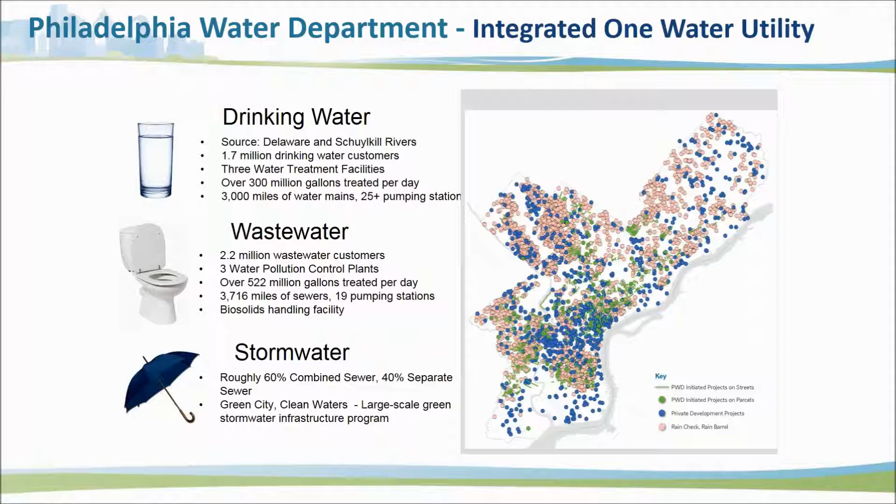And we are responsible as well for stormwater for the city of Philadelphia. So lots of responsibilities, and you can just see some of the distribution there. I will get into what that smattering of dots means later on in the presentation, but that's the part I'm real excited to share with you today.

Being a fully integrated utility that has those responsibilities, we have a lot of compliance obligations presented to us as well. We have combined sewer overflow requirements, we have our separate stormwater permits, we are responsible for stream and habitat work, we have some sediment-related TMDLs, and we have to protect our drinking water supply for over 2 million people. And we do this all obviously with a stakeholder in mind, with our ratepayer in mind.

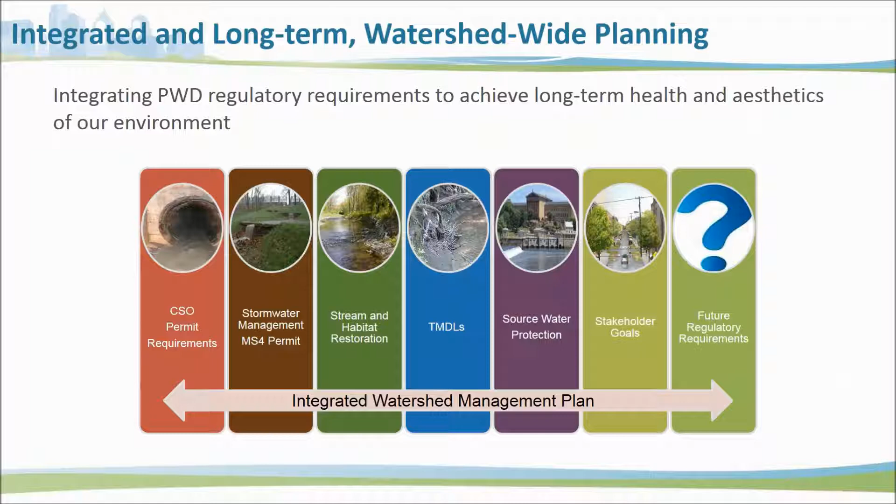That is how we collect money, and that is how we do our business. So yes, definitely integrated. We think long-term, we think watershed-wide, and we think not just about the now, but how we're investing in approaches that help us meet future regulatory requirements.

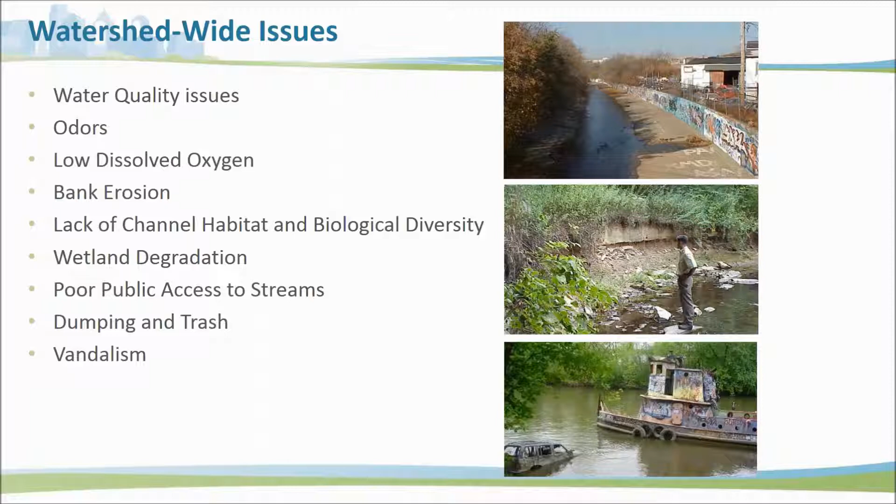Unfortunately, being an old urban center, when you start thinking watershed-wide, when you start looking at your water environment and what's remaining of it, when you do have combined sewer overflows and separate sewer areas, we have a lot of issues. A lot of people say, why are you showing this slide? This is terrible. But this is the challenge, this is what we're up against as water resource managers. How do we take poor habitat and stream channels and vandalism and odor issues and channelized portions? These are the water resources we need to protect. And in order to protect that, we have to think a little bit differently about what the solutions may be.

Understanding that maybe some folks on this call may not know combined sewer versus separate sewer, very quickly just wanted to show the difference. They both have their problems. In dry weather, we actually can treat a lot of the sanitary flow that falls in our pipes. But during wet weather, we actually exceed the capacity, and that's where the problem is. We get diluted sewage, we get all kinds of stuff, antifreeze, oils, pet waste, you name it. The stuff in your toilet, the stuff in your washing machines, all have the potential to exit and hit our water bodies.

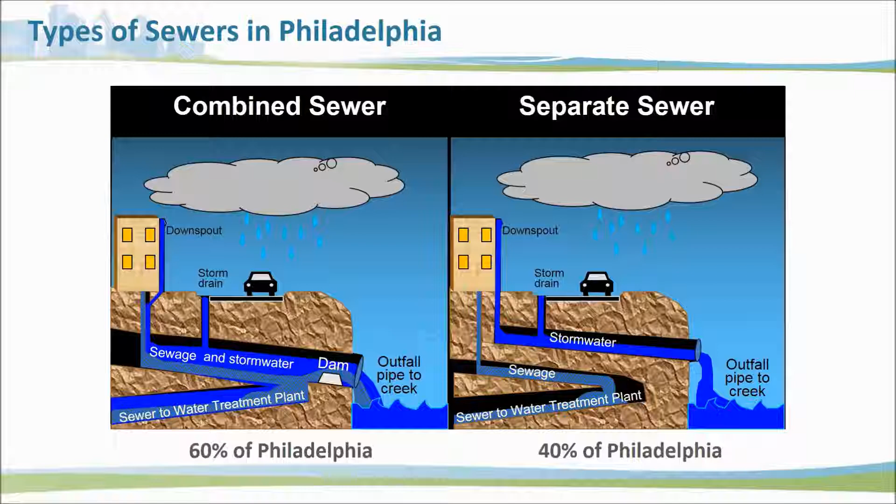And that's really the challenge we're going to focus on today, trying to meet combined sewer overflow policy requirements. Just to give a little bit of a glimpse, this is not just a national issue, it is a national issue, but it's very specific to certain areas throughout the country. Philadelphia is one of those communities that is subject to combined sewer overflow policy, as it all kind of started out of the Clean Water Act in 1994.

The program we're discussing today is much bigger than just the green aspect, but our green infrastructure piece is the backbone of our program. I say that, and I'm going to focus on this as we go through the lessons learned and the implementation of the last 7 years. This is a 25-year plan, a multi-billion-dollar plan, we estimated it in 2009 to be a $2.5 billion plan. We may actually be spending more than that, and that's one of the points I'll raise later on in this conversation.

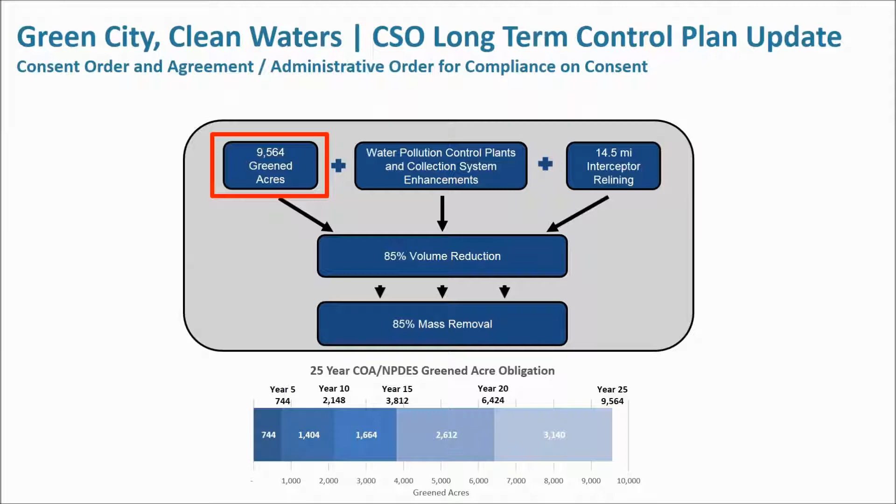It's not just a green program. It relies heavily on plant expansion, upgrades, and relining a whole bunch of our crucial intercepting pipes throughout the city. You can't have a green infrastructure, nature-based, source control type of approach without having a very, very strong traditional infrastructure backbone. So I want to make sure I give the credit to our traditional infrastructure that's due. Keeping water out of your sewer system doesn't mean anything if you don't have a sewer system that's doing the majority of the work. So I will definitely be focusing on the non-traditional elements of infrastructure, but very much respect, appreciate, and I'm grateful for the traditional infrastructure that is there. So a 25-year program with 5-year implementation chunks, and I'll get into this a little bit more.

So what is green infrastructure? This may be redundant or obvious to most folks, but I really just wanted to focus on a lot of these key words here. We look at any bit of infrastructure that does interception, infiltration, evaporation, transpiration, some harvesting and reuse, and even some instances where we get storage and slow release back into the system, all meeting the terms of our greened acre. The greened acre, although it sounds like it's a physical dimension, it's actually a volumetric measurement.

So we're looking at the amount of water that's managed, the depth of water managed over an impervious acre. To elaborate, if we were to manage 1 inch of water over a 1 acre impervious parking lot with a small bioswale, as long as we managed 1 inch of water from that acre, we actually say that whole parking lot is a greened acre, even though the physical expression may only be 1/10 of an acre with a bioswale.

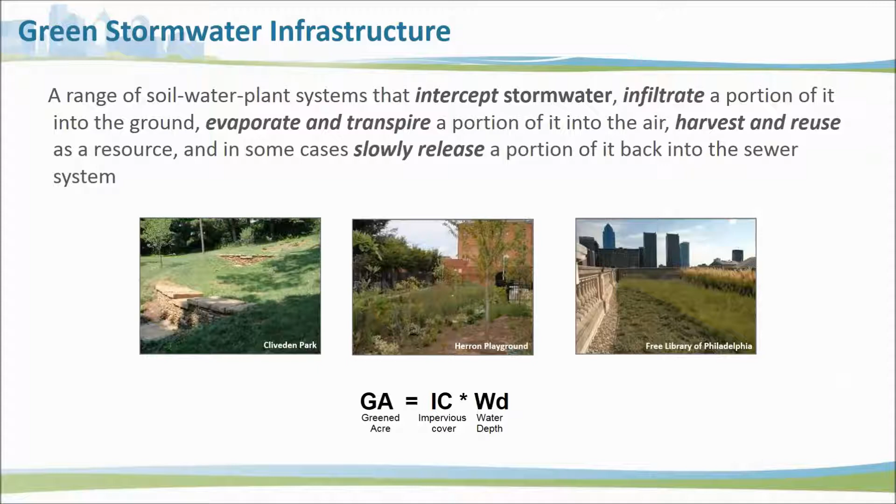The opposite of that could be a green roof, where if you're managing an inch of water over a 1 acre green roof, that too is calculated as a greened acre, but it actually is a physical looking and acting greened acre as well. So it really is just a measure of volume and a measure of greenness to an extent. I just wanted to clarify that up front.

So that's what green is. The why are we looking at green infrastructure? I mentioned that we're an integrated utility. We're thinking about the Clean Water Act, which is your fishable, swimmable, and we also think about what we have to do from a source water protection standpoint through the Safe Drinking Water Act, which adds that drinkable element to it. And then I mentioned thinking about our ratepayers and giving back and investing in our communities and trying to maximize the return on investments. And then you add the safe, attractive, and accessible piece to that as well.

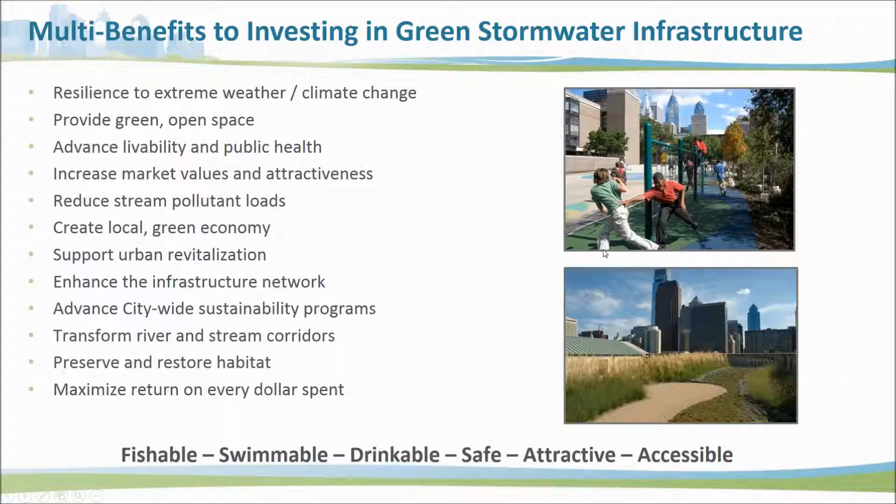So compliance meets ratepayers' needs and wants, and that, I think, is the benefit of green infrastructure. A lot of the things you're going to see on the screen here too: green jobs, urban revitalization, public open space, adaptation and scalability and flexibility with dealing with a changing climate, advancing city sustainability goals, thinking about the whole system, not just end of pipe kind of solutions. So that's kind of the benefit of why we went down the green infrastructure path.

I talked about the 5-year increments, and these numbers are kind of drastic. This is the point in time we're in right now. I said we're about 7 years in - we actually just hit our 7-year mile marker on June 1st of this year. Just to give you a glimpse of where we stand, I'm giving you the good news: we're over 1,100 greened acres complete, and we have about 2,000 that are in works right now. So we're very much on our way to meeting our 10-year compliance obligation, which is June 1st of 2021.

But what you can see here, these are big numbers. These are big numbers in a dense urban environment, so they're a little bit skewed towards the tail end. You see it's kind of an exponential growth. But we're looking at modifying or managing stormwater from an urban setting for about 1/4 or 30% or so, 1/3 of our combined sewerage section of the city of Philadelphia here.

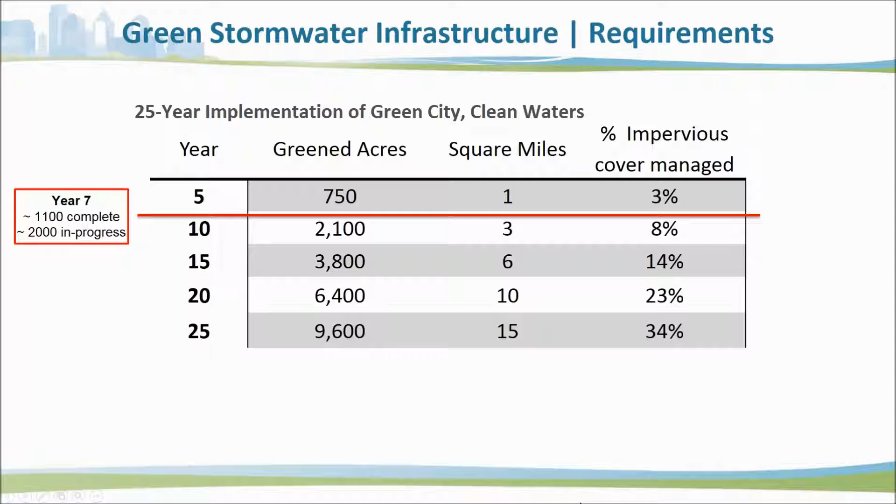Pretty big numbers, so I tried to dust off a graphic we used for a big celebration to try to save some money. This was our 5-year celebration, just wanted to let you know we're 7 years in. And I wanted to focus on kind of the 3 tools that have been our major delivery mechanisms of how we've gotten our green infrastructure to date and how we do business.

And I raise this only because to me this is more about a philosophy. We knew we had uncontrolled stormwater runoff issues in the city, so the first line of defense was us instituting stormwater regulations. I'll go into this in more detail, but when you know you have a problem, your first line of defense should say, maybe we shouldn't make it any worse. So we were able to interject ourselves into the stormwater, into the development process here in the city. Basically anyone that builds in the city now has to meet stormwater management obligations for channel protection, flood control, and water quality requirements.

So the idea is that new development does not do any more harm here in the city. Looking at the center piece there, the incentivized retrofits: for existing properties that generate stormwater runoff, we've actually come up with a program to incentivize retrofits where they manage water on that site and get a stormwater fee reduction to take water that is contributing to our system and try to limit how much is getting into the system. So the philosophy is taking what is already there and trying to have it do less harm than what it does.

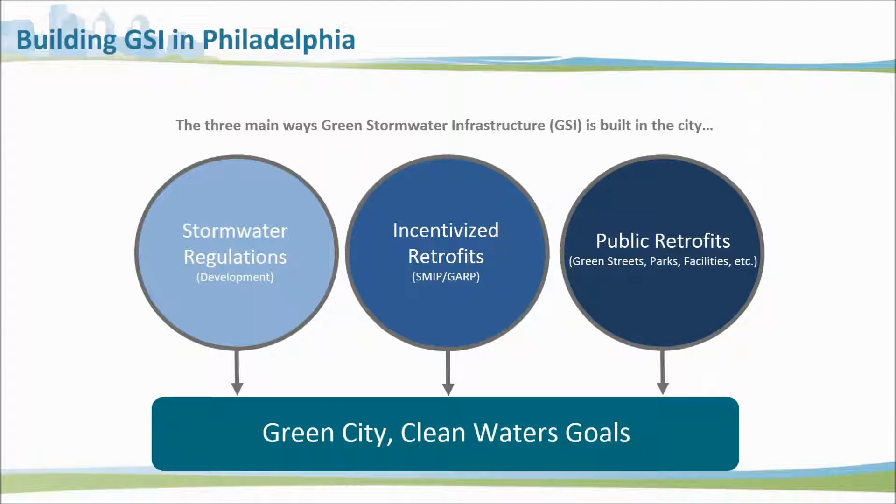You look at the third arm too, which is our direct public retrofits - kind of that last line of defense. If you're not regulating it and you're not trying to undo what's there, how can you strategically place and invest in new infrastructure to manage water and take some of the burden off your system? That's the third arm of the program, how we do direct public retrofits.

So what are the fruits of our labors to date? 7 years in, you can see about 80% has been delivered through private development, or through our public-private partnership with these incentivized retrofits. And then about 230 or so acres that have been delivered by way of public retrofits. So that's kind of the breakdown.

You're seeing a lot more dots in this area, and you're also seeing dots that transcend just the combined sewer area to be citywide. That's because our CSO program, or Green City Clean Waters program that meets compliance obligations, is focused on investments - that's the 1,000 acres in the combined sewer area. But our stormwater regulations, our incentivized retrofits, and our homeowner retrofit programs actually happen citywide. So Green City Clean Waters the compliance program is a little different than Green City Clean Waters the philosophy - the vision, the ambition, the goal to think about our entire city and region using nature-based solutions to manage stormwater-related activities.

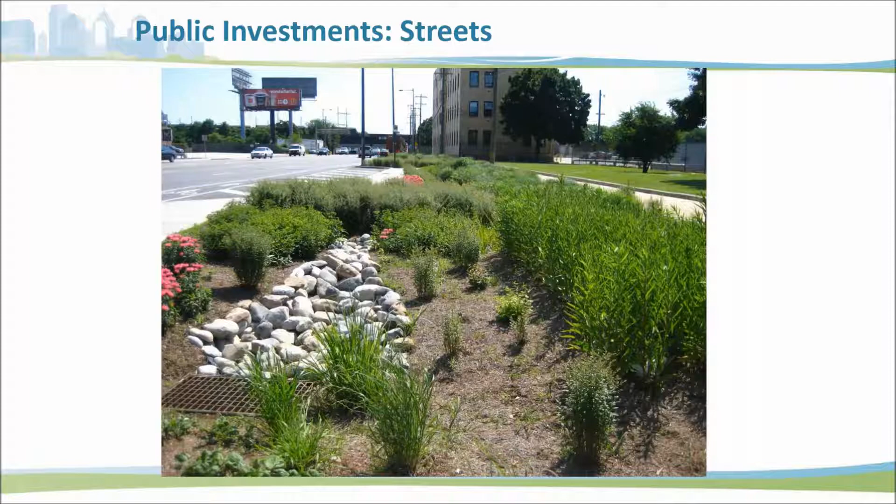Areas where we have the ability to integrate it into the landscape, we do more of the rain garden concept like you're seeing on the right. We modify some of our schoolyards - we try to keep as much water at the surface as possible, keep these things green stormwater infrastructure. But sometimes they are stormwater management practices, and some of the magic is happening subsurface, like in the photo on the right, which is a lot of porous pavement and a pervious ball field where a lot of the water is actually soaking through into the underground basin structure.

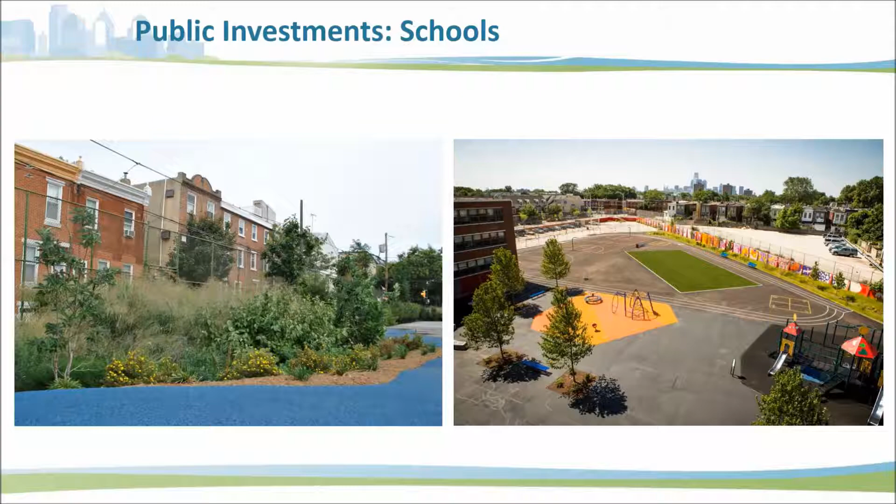And when we have the ability to do homeowner retrofits, we do some downspout disconnects, and we bring water to rain gardens or through flow-through planters or rain barrels. So just some looks and feels of what we've done.

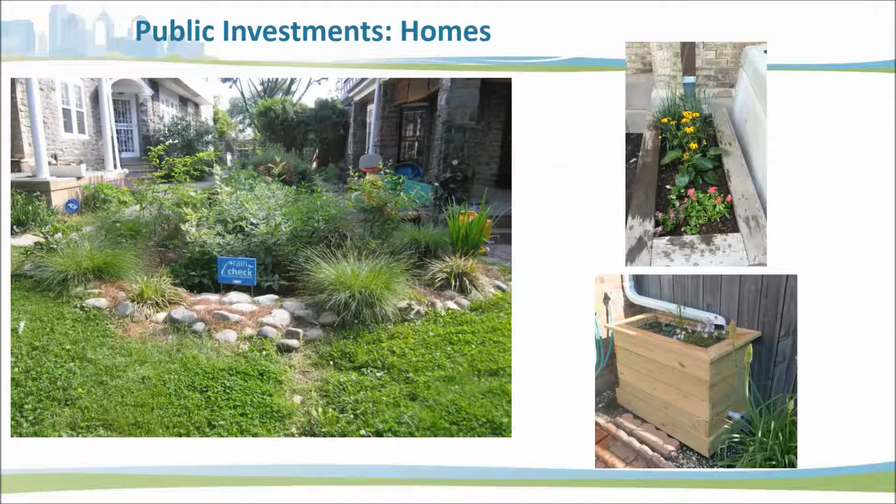Some of our applications through our development regulations have really been embraced by the development community. You have an individual or a company that owns a hardware store - when they did development, they managed a lot of their runoff through periphery bioretention and swales on the outside. Or you have something like green roof development where people have integrated that into their business model and usable space and financial gain by also meeting our stormwater regulations.

And then just some examples of parcel-based retrofits and these incentive programs we offer. You have people really looking at their land use, trying to figure out whether or not they really need that impervious cover. Just to give a little glimpse, we bill on stormwater here - it's one of our charges. We bill 80% based on impervious cover and 20% of your stormwater charge is based on gross area. We give individuals the ability to get up to an 80% credit by managing stormwater on their parcels.

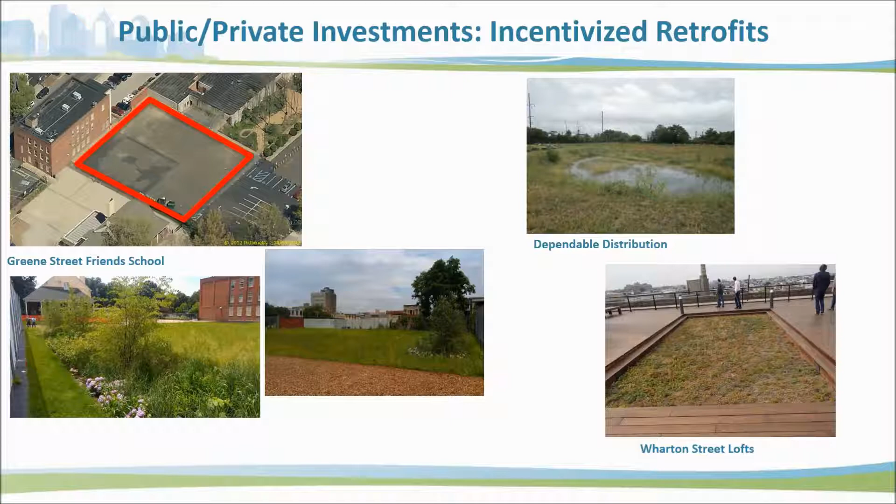So you can see some folks have done parking lot retrofits, some additional folks have looked at roof retrofits, and some have the ability to look at ways to take advantage of their large land area and do traditional retention, detention kind of concepts. So a lot of different things, and that's a glimpse.

I want to get into, obviously, the lessons learned. This has not been an easy process. We have a long way to go. We have a lot of needs. And I'd like to give people glimpses into how we've rolled out the program to date and see where the improvement zones are, or a little more detail of what we've done to date.

So when we originally started, obviously planning, we were looking at our street corridors. We were trying to say, well, that's dedicated, always going to be there, impervious cover.

Let's try to look at that land and figure out ways to manage it. So really our program started with a Green Streets retrofit program. We were looking at big pieces here - street widths, number of parcels that could be impacted, setbacks, slopes, utilities, and infiltration. We realized this is not just going to be a Green Streets program. Although it's a lot of impervious cover in our city, it's got a very challenging environment and it needs to be just one tool in the toolbox.

So we started thinking from a district planning approach. How do you tackle a big problem? How do you eat an elephant? One bite at a time.

So we started drilling down into neighborhood-based planning. In this case, this is our combined Sewer area broken down into 4 geographic boundaries. We have our river wards, we have our university section, we have North Philadelphia, which is definitely a low-income, underserved community with different issues than some other sections of the city.

So we really got to know the geography and the spatial land use breakdown of our city, and built teams around that - public outreach teams, planning teams, design teams that catered to the communities themselves. Obviously, this is not a program that we're going to do alone.

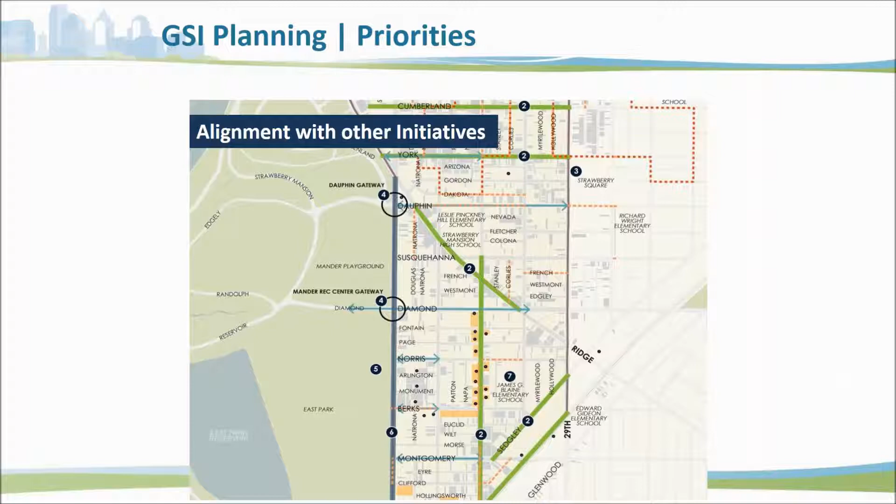So you can kind of see that we are an opportunistic program, latching onto other initiatives, because that's what's necessary here.

I'm not going to drill into this in detail, just illustrations of looking at it from a neighborhood scale and trying to think where opportunities are, but then taking that down into much more detail - where does the water go? Where does the management practice end up? How much water can we get there? Really trying to drill into a very detailed, inlet by inlet, impervious area by impervious area type of approach to really do site identification.

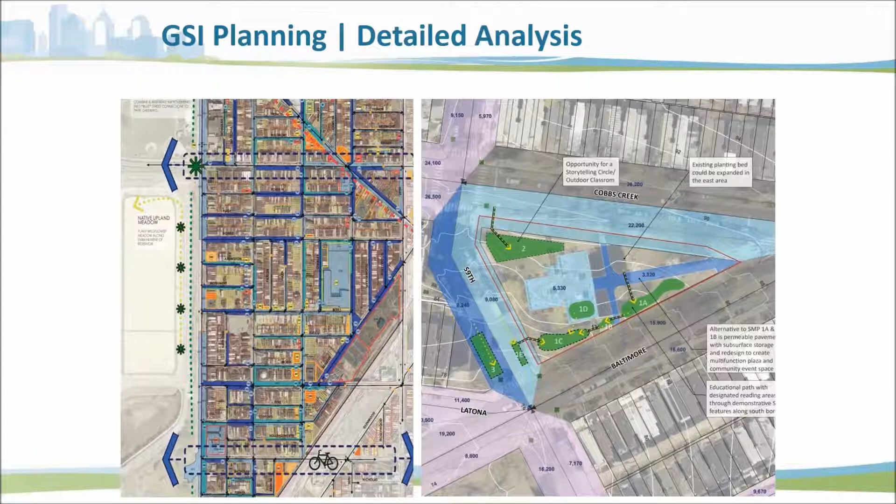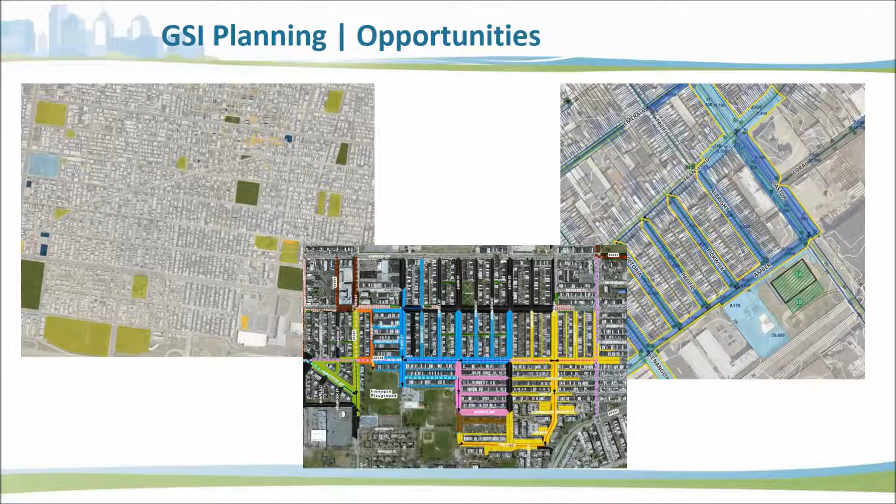And that lends you to thinking about big scale at park and rec facilities, street scale like the image on the right, and in some instances trying to take a blend of that - looking at multiple street locations and trying to figure out ways to bring that to centralized locations, to take this decentralized stormwater concept into a centralized stormwater concept.

And then this to me is a perfect illustration of how we've really built the tools, or have the understanding of how we can look at a traditional typical neighborhood here in Philadelphia and figure out how to apply the tools that fit.

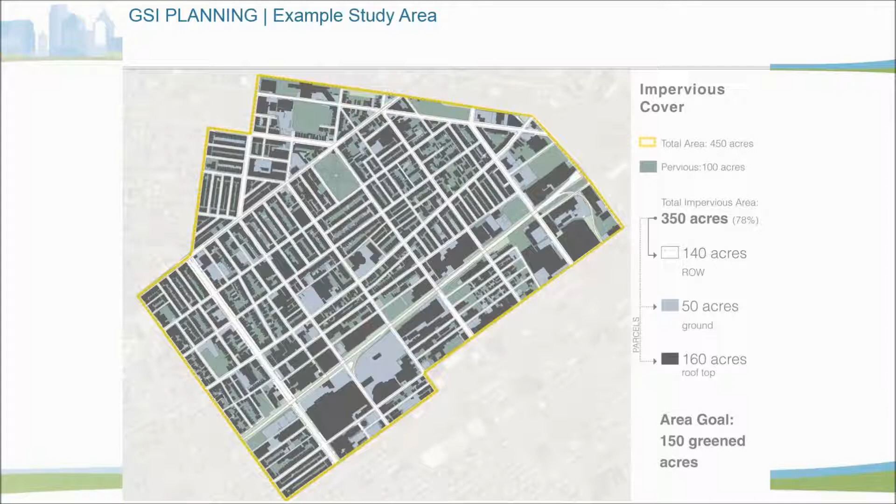So when you look at it from a land use standpoint - I won't go too much into that, that's just the impervious cover breakdown - you look at things that we've already done for managing street areas. You look at projects that are in the queue where we can manage additional street runoff with green street practices. You look at areas where we've managed water on city-owned facilities.

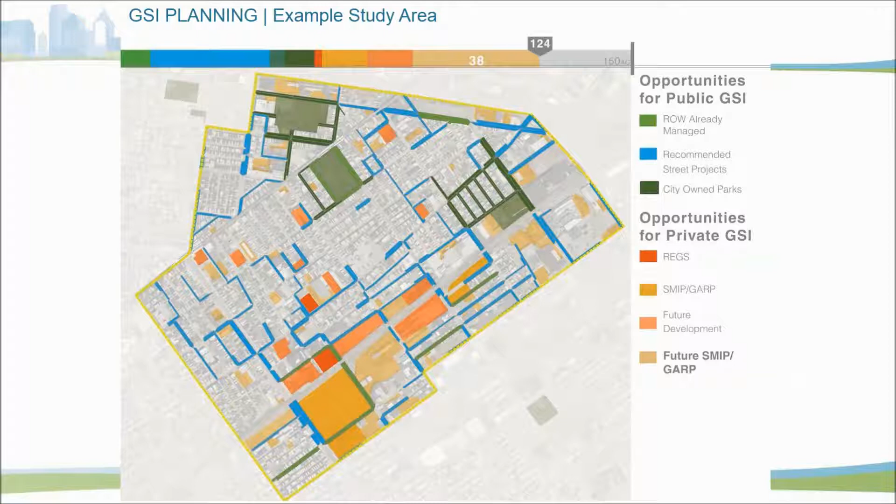In this case, it's park facilities. Projects that have gone through our stormwater regulations. Projects that have gone through our incentives program that have managed stormwater. You start looking at areas that we, or the Planning Commission here, think are ripe for future development - you can see those are areas that we think will transform over the life of the program where we don't need to make direct public investment. We think we can get it through development. We look at areas that we think are primed for additional incentivized retrofit opportunity.

And then you start looking at other city facilities, schoolyards, and the ability to start to pilot some residential rooftops. You can see how you can transform a typical neighborhood with the tools that we already have in our possession. So it gives us the hope and confidence that we have the right approach and the right tools - it's just how we facilitate them and how we really spur action to get this stuff to happen.

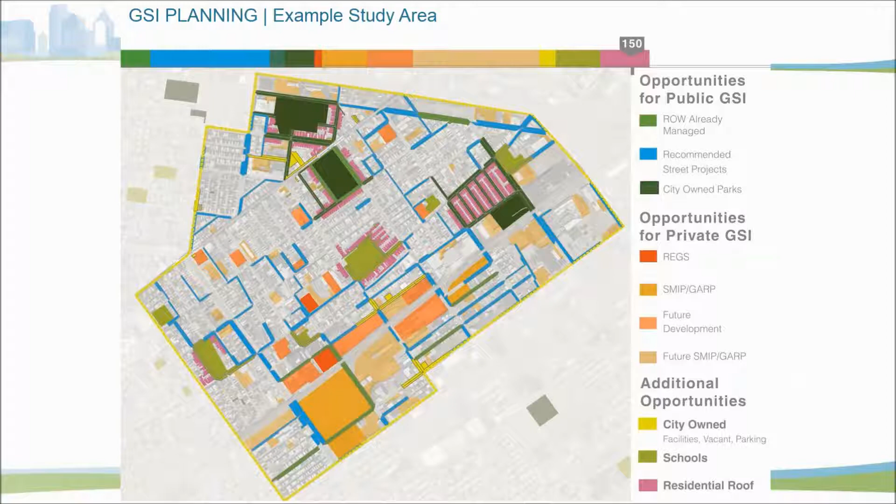You can see how that neighborhood can be transformed, and we think we have the suite of things to allow us to manipulate the land like we need to.

The transition of what that means into design, I tried to sum up some keywords here. We've learned a lot of lessons in design. The first project we did doesn't really look anything like the project we did last week, and that is a good thing.

That's key in thinking about doing this type of work for the long haul and institutionalizing it: standardization, feedback loops, constant community input, coordination at every stretch, whether internal with our collector systems group, operations group, finance group, or external partners like our streets department for street opening permits and traffic controls. So constantly figuring out ways to standardize, streamline, and document all of the processes that allow us to do our business for the long term.

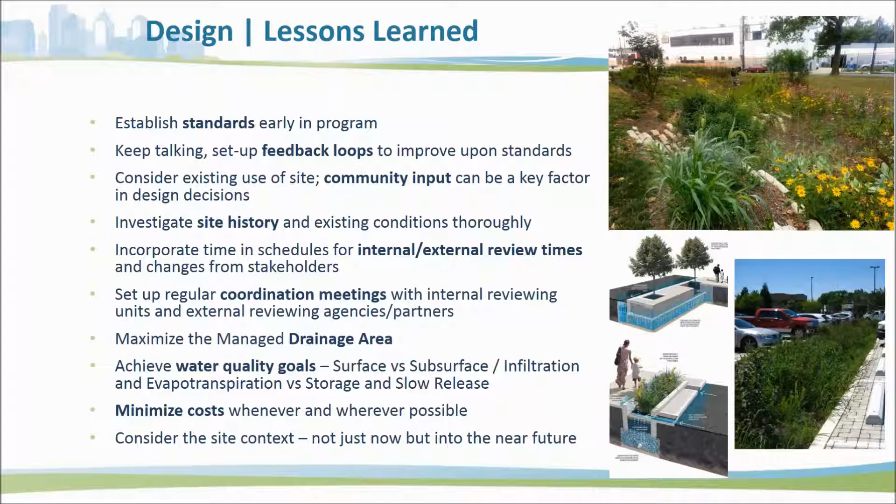Obviously, keeping in mind, you have to know what your water quality goals are, how to minimize costs, and site context - not just now, but what that site may look like 5, 10, 15 years into the future. So lots of designs, which leads you to lots of different implementation tools as well.

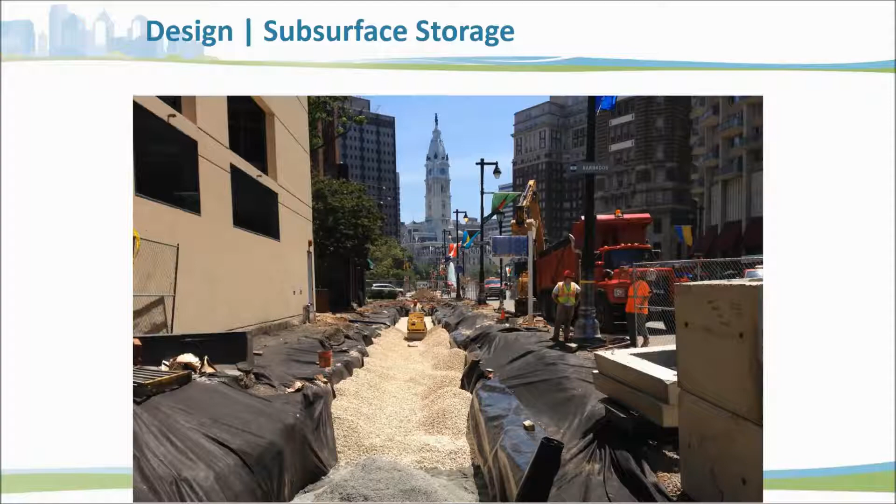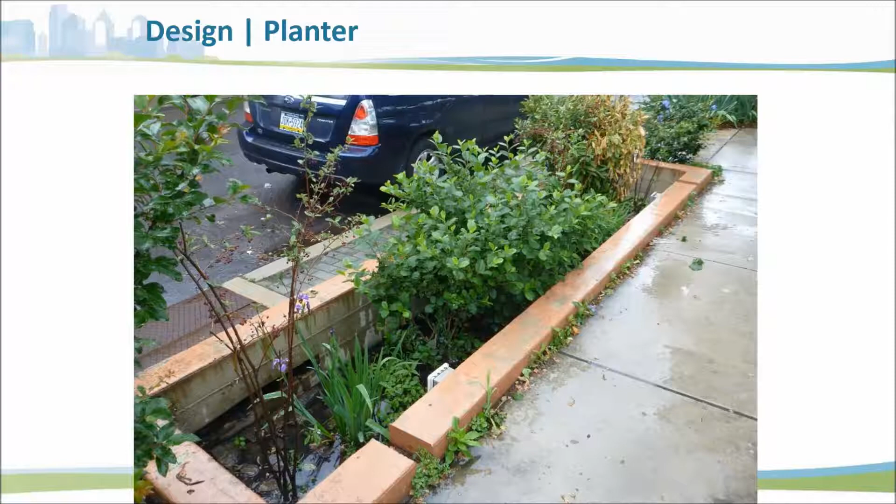In some neighborhoods, we have the abilities to do bump outs, or we have wider areas and the ability to allow people to exit their cars, kind of Portland planter style. So we're able to integrate some of these into certain neighborhoods.

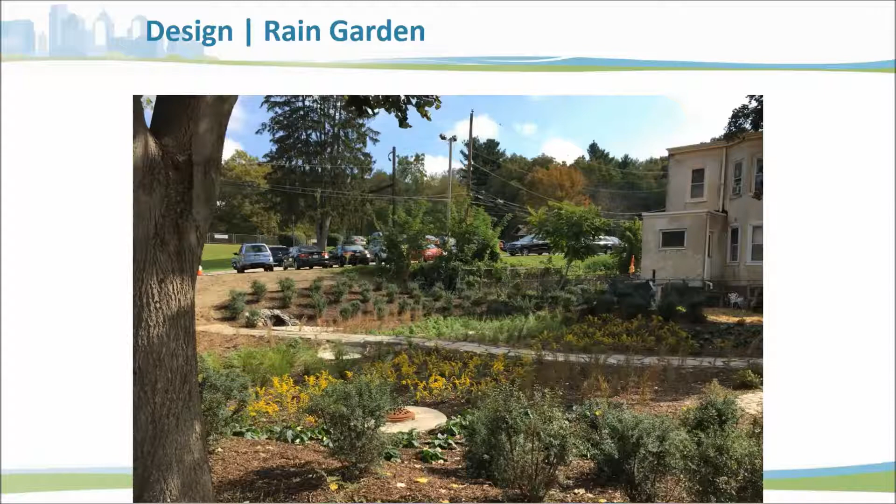When you have space, we try to do the bigger rain gardens. We can get more water, we get the more nature-based piece of it. We take advantage of all the benefits of vegetated practices. So we fit them into the landscape when we can.

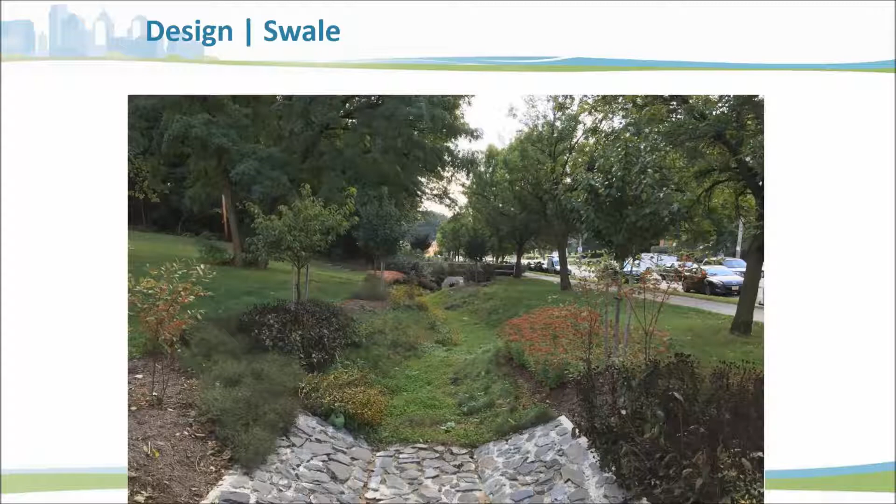Same concept with swales. This takes advantage of the slope we have in this park facility, and we're able to manage a lot of water from the surrounding neighborhood in this area.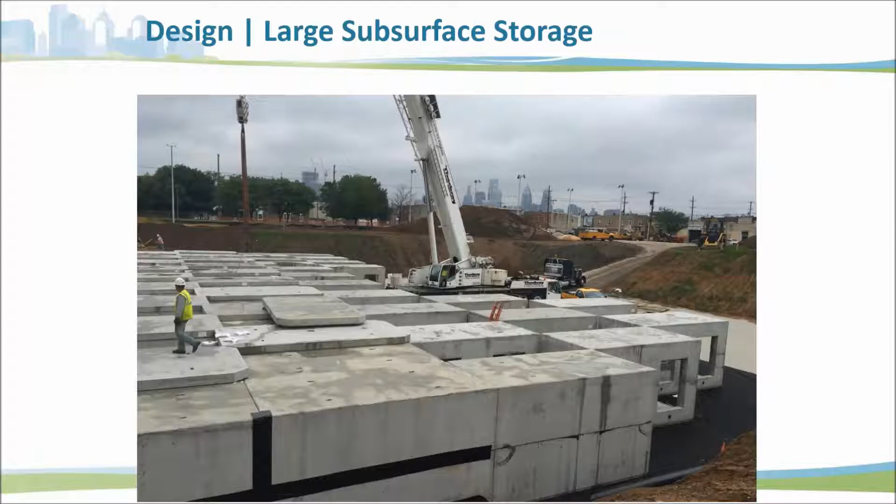In some instances where you actually don't have the physical green expression, we're still able to do a large amount of stormwater management, taking advantage of infiltration through this large subsurface storage and infiltration basin. At the end of the day, we're going to come back with a football field on top of this. So we've embraced the park setting and the park use there, and we're able to manage a large amount of stormwater.

Standardization, again, is key. Everything we do is documented in ridiculous amounts of detail, and the idea is to distribute it.

This is not just for city folks. These are for the development community, for the national community - anyone that wants to see how we're doing our business and would love to chime in on how we're doing our survey work, geotech, landscape, CAD standards and standard details. You name it, all of this stuff is documented for consumption by those in the space.

And we would love to take feedback and hear how we can improve our program the way that we've done it to date.

Not to get into too much detail here, but again, just what you really need to think about from a requirements and constraint scenario - this is engineered, it is infrastructure. It needs to be engineered, although it's natural. So we're constantly figuring out ways to modify our design requirements and our guidelines, and we do a lot of this with input from the design community as well.

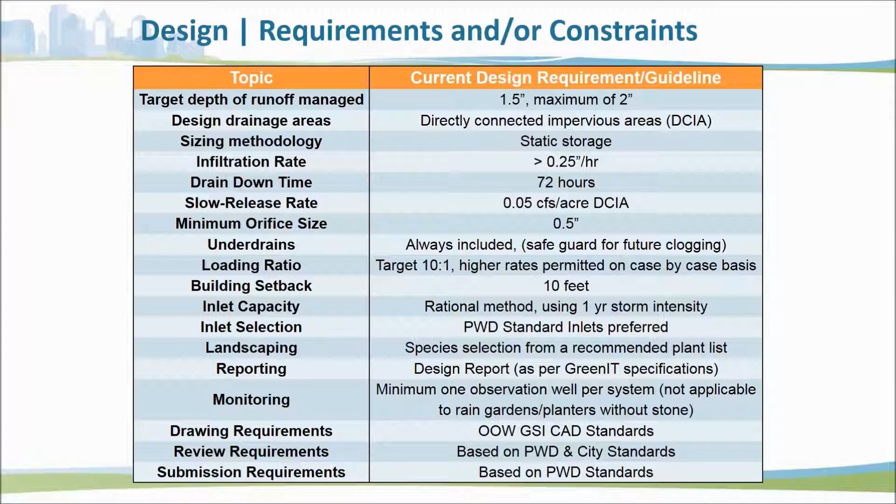Just to give you a glimpse of some of the key things that stand out to us when we think about requirements and constraints - again, all of it's tracked, all of it is digital. We do this for metrics reporting, for information management, and later on I'll show you how we use this stuff to feed into our work order management system for the maintenance aspects as well.

A lot of this allows us to track data in ways that allow us to deliver it as a regulatory compliance obligation. So everything is scripted, documented, digitized, scanned, and tracked in extreme detail, because this is obviously compliance-related material as well.

That said, maintenance - when you're investing in the neighborhoods using nature-based solutions, when you're trying to make community amenities, obviously maintenance is a major component of what we're trying to do.

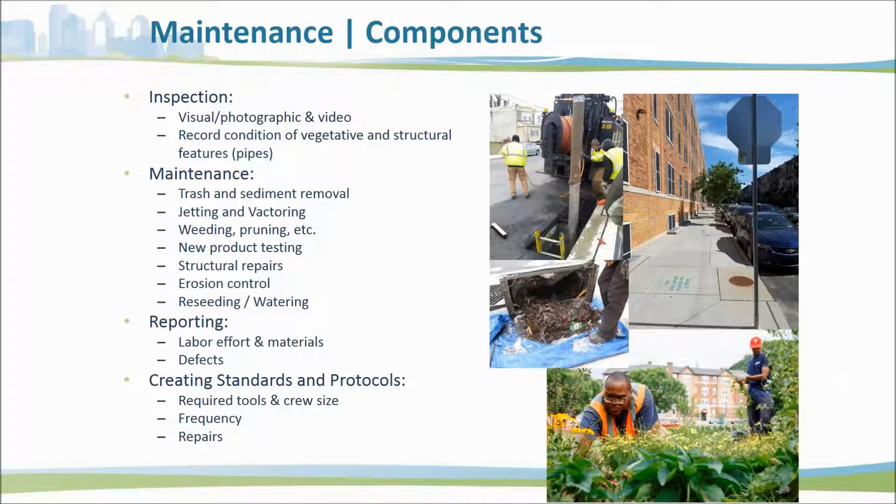I don't want people to think maintenance is just boots on the ground, removing debris. There's so much more in a maintenance program, like wet weather and dry weather inspections, the reporting aspects of it, and then standards and protocol development so you can hopefully have efficiencies in maintenance moving forward. Just some glimpses into the growth of the program over the last bunch of years.

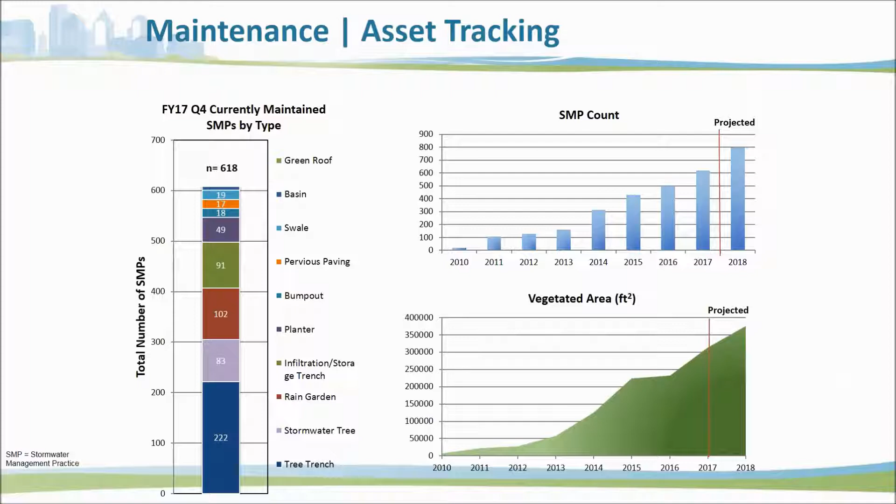We try to track a lot of our assets by stormwater management practice type, by vegetated area, by quantity, by count. All this helps us figure out how to deal with not just maintaining the assets, but how to build the resources that we need for a growing program. So we're looking at trends, we're looking at quantities. All this is built into how we're dealing with living practices that are exponentially growing as the days go by.

Infrastructure, asset management - key words here. These aren't just systems that we put out and hope that they live. We treat every single component like the asset that it is, so they fit into our work order management system just like any other linear asset, manhole, fire hydrant, or pump station. Everything is coded and documented and given specific numbers so we can maintain it appropriately.

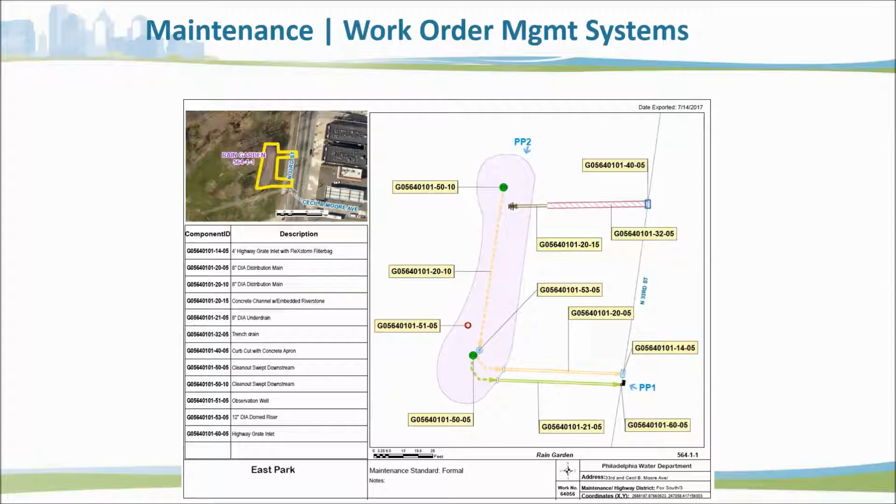Just some glimpse into what we do. The wet weather tells you a much different story than dry weather tells you, so the inspections piece is key. The subsurface elements - some of the practices have a lot of magic happening underground. So we take advantage of traditional subsurface maintenance equipment with flushers and Vactors and video cameras. That's a piece of it.

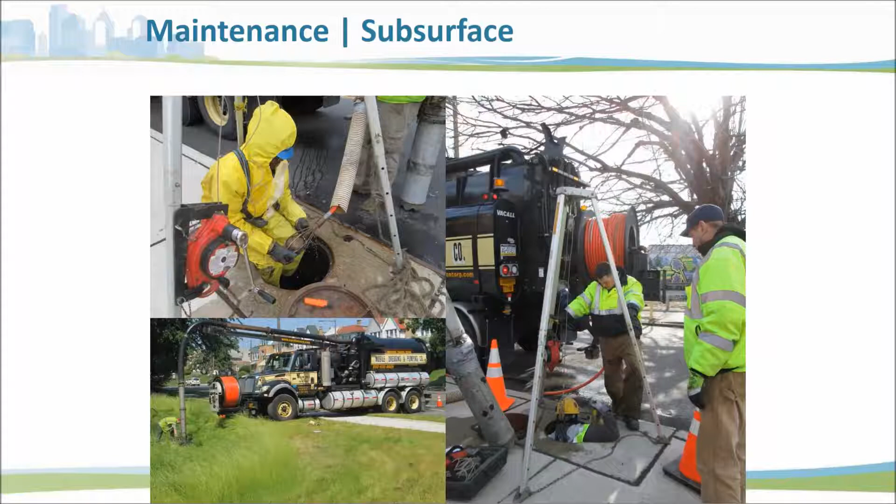Again, complex systems, many moving parts - you need a diverse delivery or maintenance system. So some of these are infrastructure, utility infrastructure identification. Some of it is landscaping, some of it's tree pruning, some of it is trash and debris removal, and some flushing and Vactoring. So a lot of different companies have had their hands here.

One of the best stories that deserves its own hour-long presentation is a branch of AmeriCorps, this group called PowerCorps, which are at-risk youth ages 18 to 25, who we've been able to bring into the department to support our maintenance program, giving them entry-level skills and allowing them to help build our maintenance program. I believe to date we have 37 individuals over the last 4 years who actually came through the PowerCorps program that now are directly employed by the water department. So it's definitely a workforce development program that has benefited not just our city, not just our community, not just the individuals involved, but the utility as well from a job creation and employee growth avenue.

Your city partners like Streets and Parks and Rec and Department of Public Property, who deals with our vacant lands, and our city facilities, our local transportation authority, our school district, our housing authority, our academic institutions - these are all some of our major partners that we've focused on in the first couple of years.

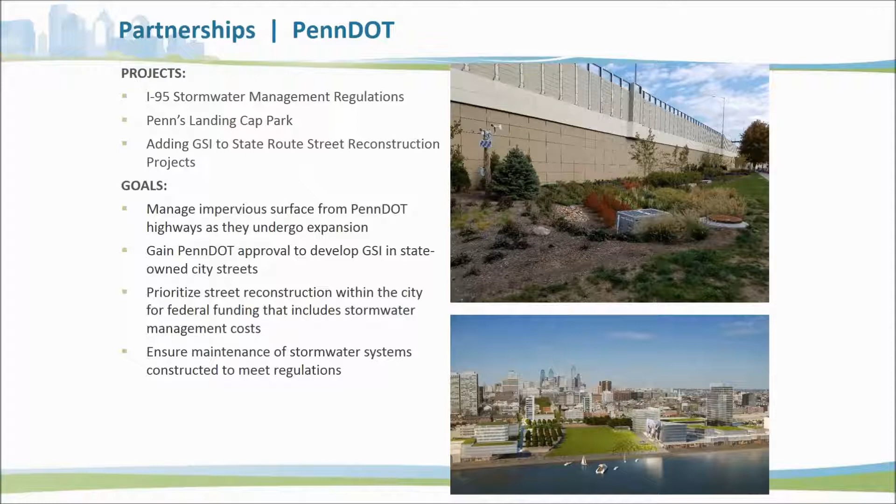So to give you a glimpse into the projects, the partners, and the goals that we have when we embark on partnerships - I wanted to run through this for some of these other partners too, but I won't touch on a lot of it. Obviously we have major highway corridors here in the city, some interstates that are being expanded, so having clear partnerships and goals set forth with them allow us to figure out ways for them to meet their stormwater regulations and their community investments in ways that meet the needs of ours from a stormwater management perspective as well. Parks and Rec has probably been our biggest partner to date.

Their land area is conducive for us to try to figure out ways to improve it and bring additional nature-based solutions. A lot of folks in the nonprofit space have been instrumental in bringing projects to life here, with shout-outs to the Horticultural Society, the Nature Conservancy, the Trust for Public Lands, and a group called the Conservancy. A lot of what happens on these sites is done in partnership, and it takes a village to do what we need to here.

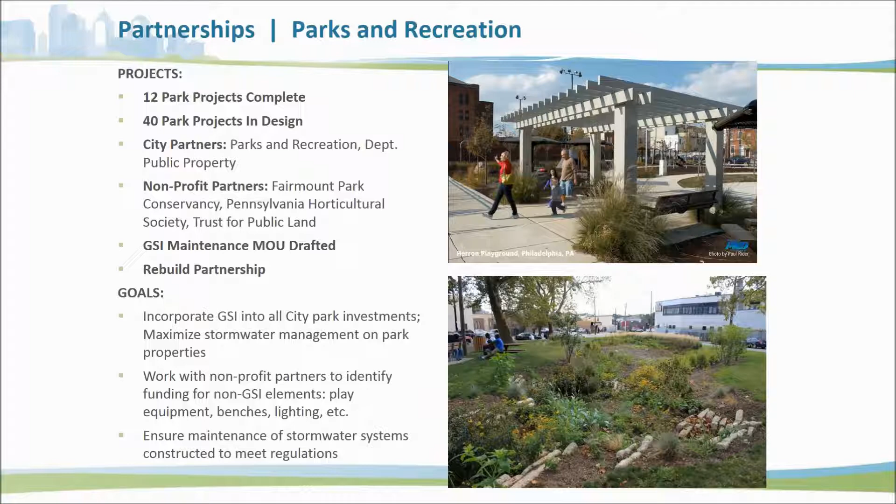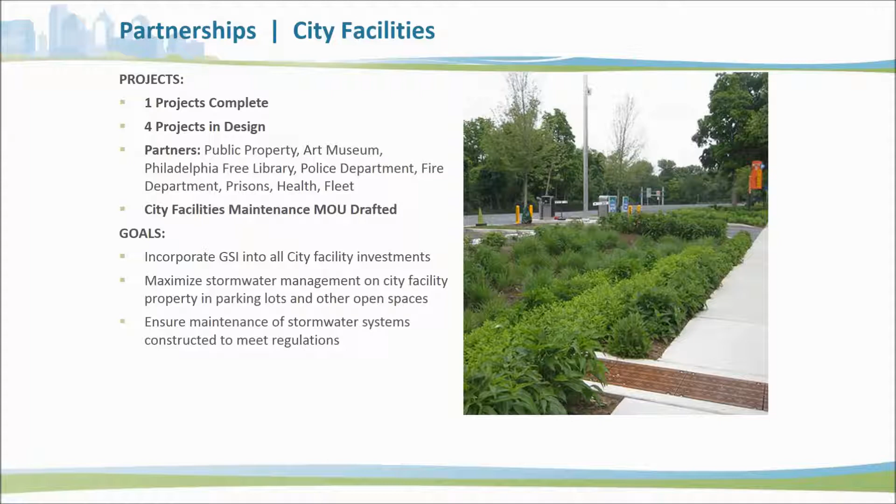So a little glimpse into that. This is an example of a parking lot retrofit near the Philadelphia Zoo. This was a publicly owned parking lot, so we pulled street runoff through a trench drain and improved the parking lot, at a very key location here in the city at the zoo.

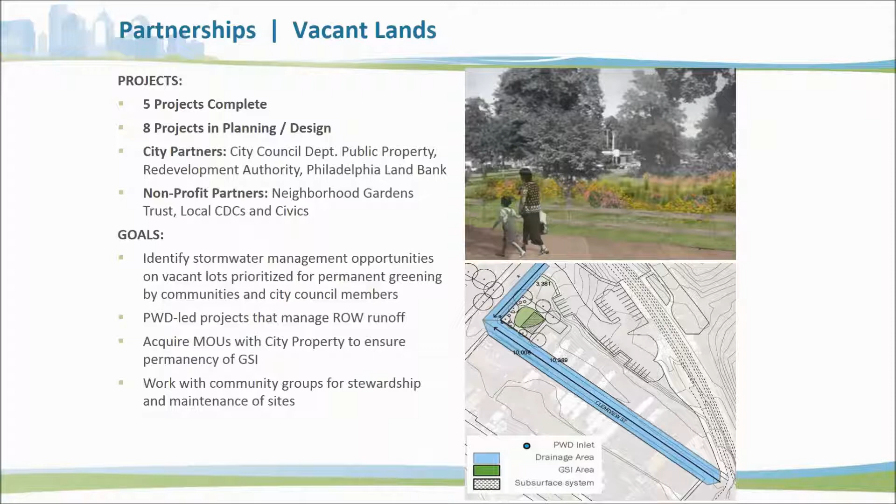Looking at vacant lands, the idea is not to manage stormwater on vacant properties that may well be developed for future growth in the city. We don't want to preclude development. We want to take parcels that may not be all that good for development and make them anchor sites throughout neighborhoods, bringing stormwater and aesthetic improvements. Here's an example close to that concept, a brownfield that looked like a traffic triangle, now more of a stormwater management practice and a community amenity.

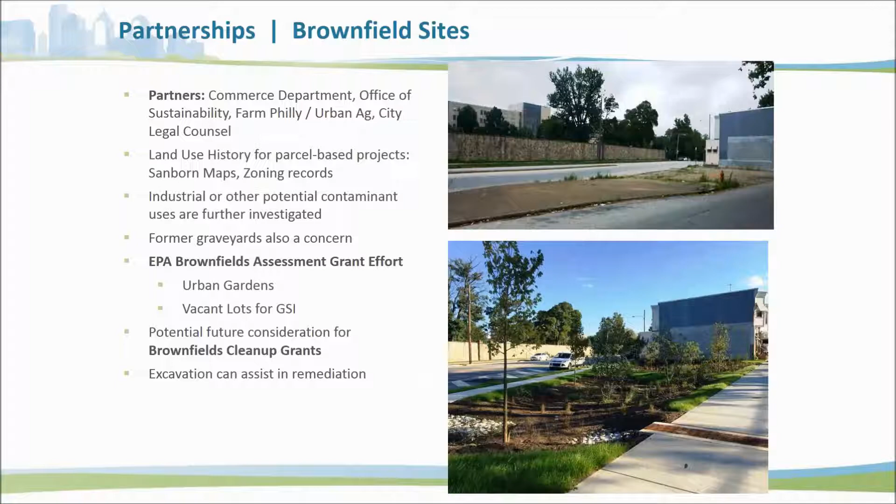Schools, to me, is my favorite program to date. It's been one of the more challenging ones, but think about who we touch in this space - students through curriculum and living learning landscapes, faculty, parents, and neighbors that live at or near these community centers, which become key anchor sites for us. We're seeing a big push to bring additional play equipment and amenities to leverage our stormwater funds in the school space.

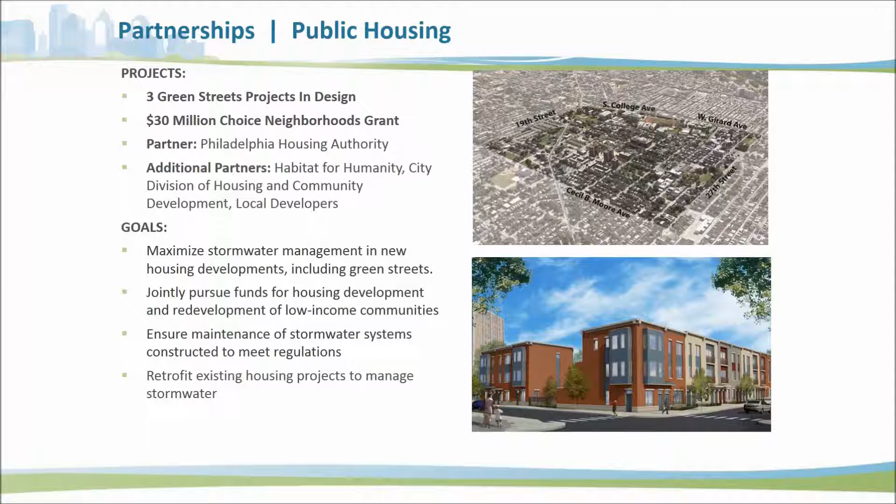And then public housing as well. A lot of folks are talking about gentrification and how development in urban corridors has not really been good for the people that live in those cities. I think a partnership with public housing, one we're working on, is showing that we can develop without displacing. It's really exciting to forge a partnership with the Housing Authority and figure out how public housing can happen alongside our stormwater investments. We're just touching the beginning of this partnership.

I wanted to sum up leveraging monies - this infrastructure lends itself to leveraging money. Just some statistics through 2016: we received about $50 million that helped with academic research, brought in choice neighborhood public housing dollars that allow us to pay for school curriculum, play equipment, recreational equipment, and trolley track removal and replacement in the street corridor. You can see how other folks are in this business to meet their needs, and we can connect those monies with ours to end up with bigger, better sites.

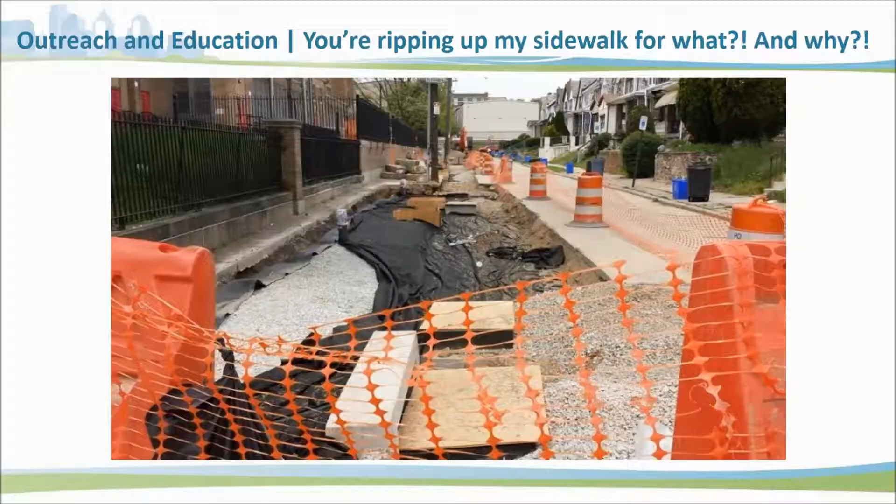I don't want to underestimate or leave out public education and outreach, obviously a major component - ratepayer funded, impacting communities, investing in communities. We have to make sure we have substantial programming around engagement and education. We have online tools like blogs and websites, we take advantage of social media, hands-on exhibits at our interpretive centers, art installations, design competitions, stormwater stenciling, and physical signage at a majority of our practices. Lots of different tools to engage lots of different audiences in many different ways. It's absolutely critical to how we do this.

The STEM education aspect of this has been a wonderful story too that deserves more time. We've been able to build curriculum and educational technology-based, engineering and mathematics-based components into school curriculums - a couple side stories that are really taking off in some of our school programming. Focusing on this two-pronged approach, we don't just want people to know we're coming into the neighborhood for construction impact - that's necessary, and we want them aware throughout the process - but when we leave, we want them to know they can still embrace and enjoy what we've done.

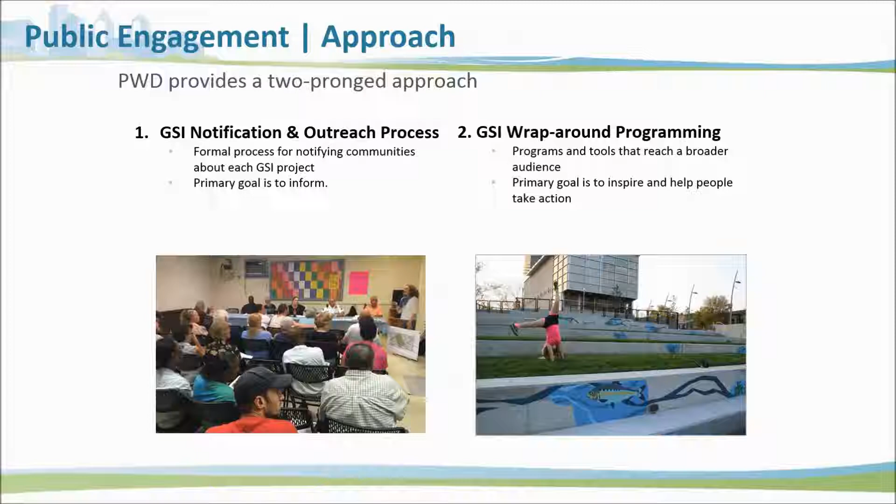So it's that before, during, and after type of programming that I think has been one of the successful aspects to date. We do the notification piece, again before in the planning, during the design or the lead up, during construction, and then post-construction, taking advantage of the celebratory aspects of ribbon cuttings and adoption programs, and holding organized events afterwards to celebrate it.

These are just some glimpses into what we've done to date and why we've done it. The residential programs allow us to work with residents on their own property, on their house, in their yards, with rain barrels and flow-through planters.

We work in the community with the goal of organizing the residents and civic associations, then connecting those folks with adoption programs that have them help us do a little bit of the basic maintenance and upkeep, and act as the eyes and ears for the assets.

And then you bring in the inspiration, empowerment, and engagement that you get through arts and interpretation. We do that through murals, street art, and some of our storm stickers as well. It's important how all of our tools connect and really engage our folks.

Our philosophy is trying to give back to our communities, give back to our ratepayers, giving them something they can feel and touch and improve their community, and at the same time improve water quality and quantity in our receiving bodies as well. So it's been pretty critical, and we've learned quite a bit of lessons.

The biggest one is it's not just that time of construction, and it's not just the people living near the practice. It's trying to engage the folks that don't necessarily live on that block but can still access the things we're building.

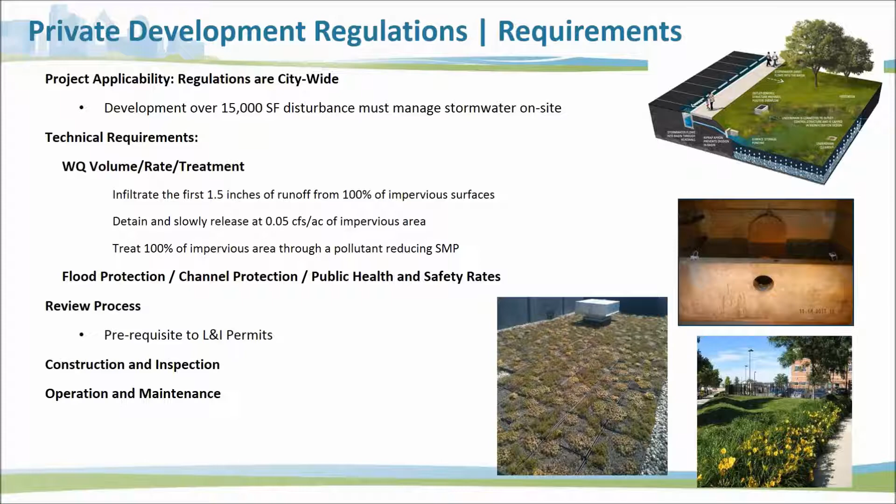This has been an unbelievably successful aspect of anything stormwater related, whether it's compliance objective or not. This is a solid way to do business when you're a water resource manager: try to figure out ways to institute stormwater regulations that work with the development community, not against it.

And that's a lead-in into this resource piece. We provide every bit of information to help the development community out. We provide website materials through online applications and project status, login stuff.

We provide guidance manuals and tracking databases, and we give all kinds of information to the development community so they know what to expect, how to expect it, what our response may be, and the status of it, because the last thing you can do is inject yourself into a development process and slow it down by any means.

That's just very dangerous in a city setting, because development is growth, and growth can be good, and growth can be done in conjunction with the city, not against city goals.

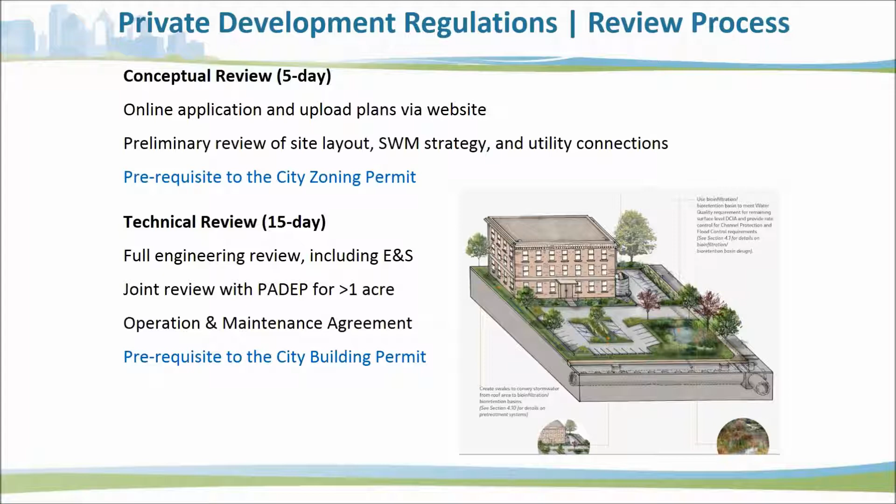That said, you have to make sure that you're turning reviews around very quickly. You can't have them submit stormwater concepts and take 6 months to get to it. So we turn stuff around in 5 days, 15 days, we really try to turn this stuff around as quickly as possible.

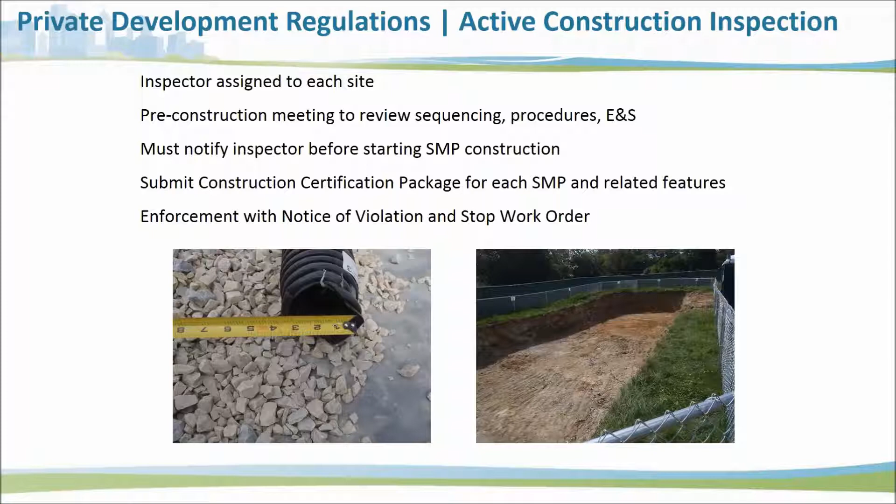And again, not just during the construction process. We're out there during the active construction piece providing input. We're out there when projects are closed out to let them know that everything met the terms. And we're out there well after to make sure they're still performing after construction closeout.

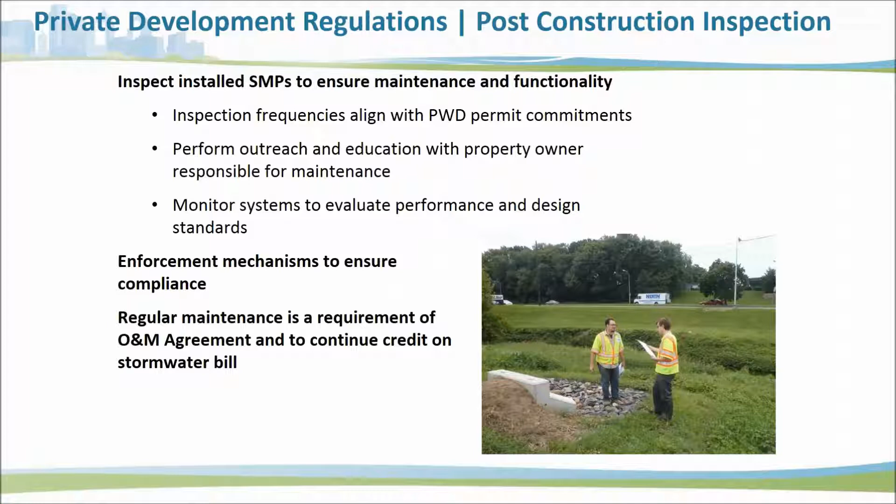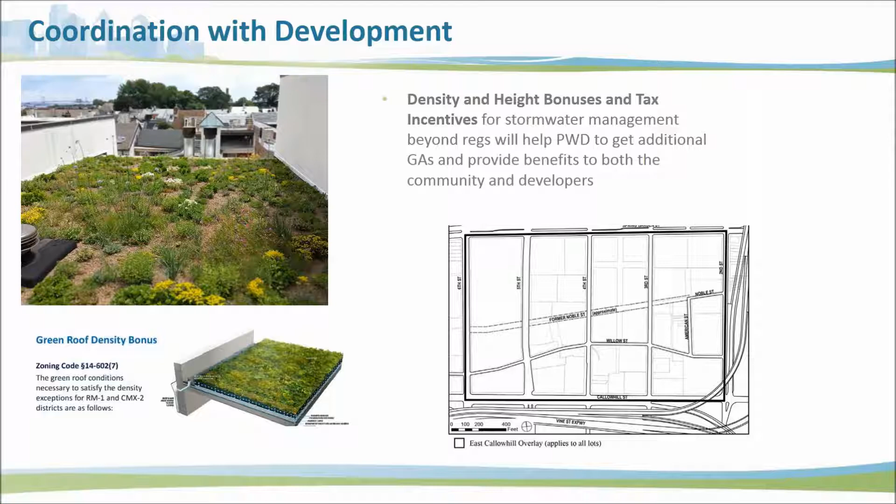The benefit of this is we now have the development community applying green roofs on buildings for density bonuses that actually have not triggered our stormwater regulations. I think we've had about 25 of the 32 applicants that submitted for a density bonus that are actually not even triggering the regulations. So we're seeing people embrace green infrastructure and green roofs without being required to do it. It's really been an exciting story.

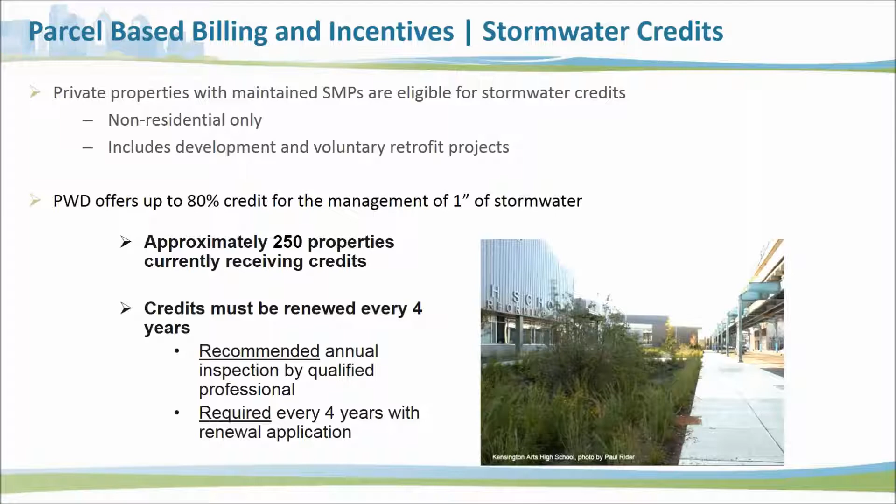I mentioned our credits program. We charge you for stormwater, and if you retrofit your property, you can actually get a fee reduction. So it's kind of a stick and a carrot approach if you think about it.

And the idea is not just giving you a credit on your bill as one of the carrots, we actually give you competitive grants. We will subsidize your retrofit if you're doing cool projects and managing water that meets our goals as well. So we're trying to grow that program, and I realize I'm cutting it short on time here, so I'm going to go a little faster.

Our billing and credits and incentives program has only been around for about 3 years now, and it's been extremely successful, so much so that we're getting a lot of interest in growth.

And then we put out some RFIs and RFPs for growing that program based on recommendations that we're hearing from our Sustainable Business Network. So the idea is to consider and continue to incentivize retrofits and new tools.

Back to the engineering piece here, I also want to say that, not just working from an aesthetic standpoint, this stuff does work. We monitor the heck out of it, and it's not just to look at performance. We're using monitoring to help us figure out ways to implement things easier, looking at ways to be more cost effective and which systems are more efficient with materials and maintenance. And all this is kind of based on feedback loops.

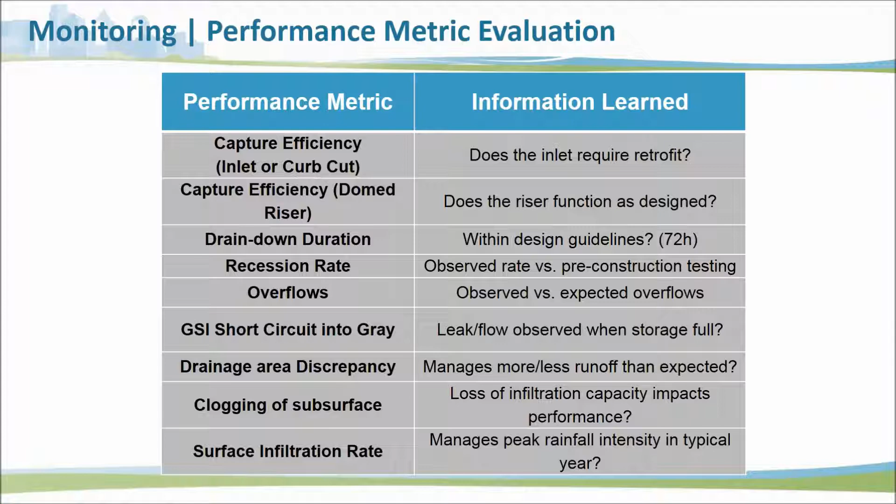So we have a lot of tools out there for how we're monitoring, and the idea is, again, a variety of tools to measure certain things. We look at drain downs, recession rates, overflows. We look to see if there's any drainage area discrepancies with our calculations, cloggings, surface infiltration rates, all kinds of stuff that we're monitoring because it all tells a bit of a different story.

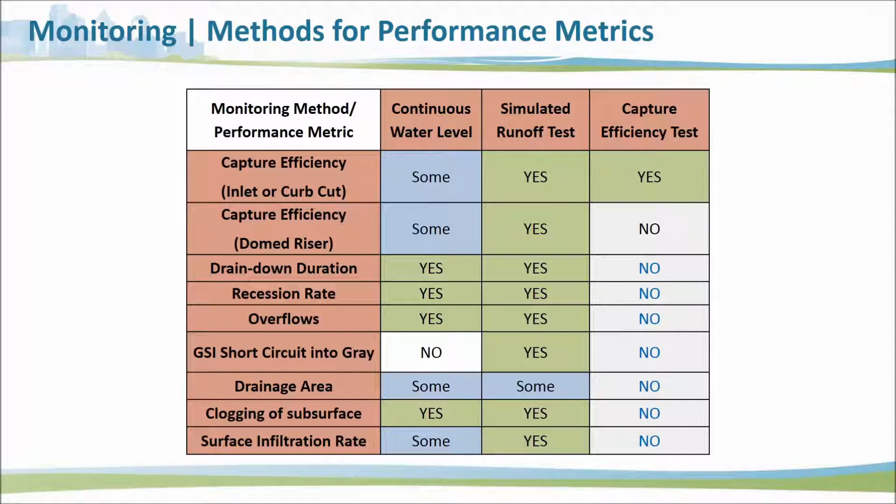And then we have different tools we use, whether it's continuous water level monitoring, simulated runoff tests, capture efficiency. They all tell you a story, and there's a tool that helps you get to that performance metric that you're trying to get to. And then you build into that kind of a code base.

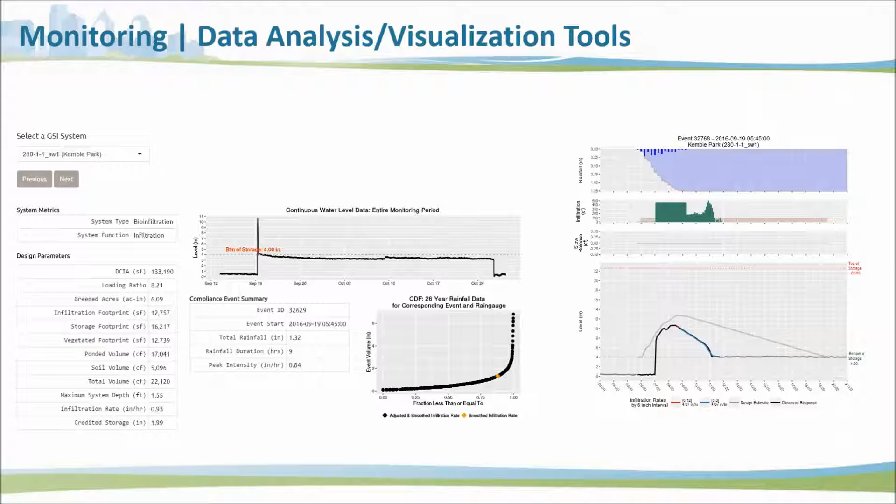This is all our code that's been built in to help us post-process monitoring information to kind of tell these stories. So again, the data management and data visualization is absolutely vital in how you're using it.

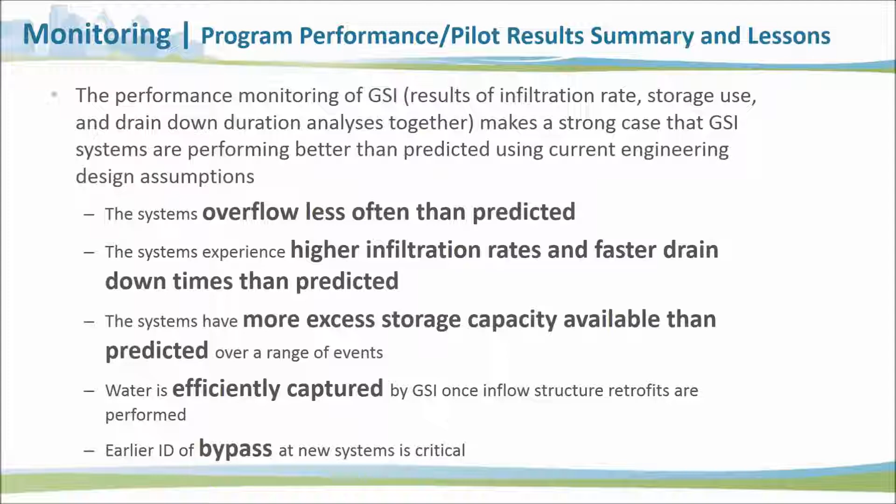And then just to tell you, these things are overflowing less. We're seeing higher infiltration, more storage, things more efficiently captured, less bypass. So those are kind of the performance requirements. That's the engineering side of does it work.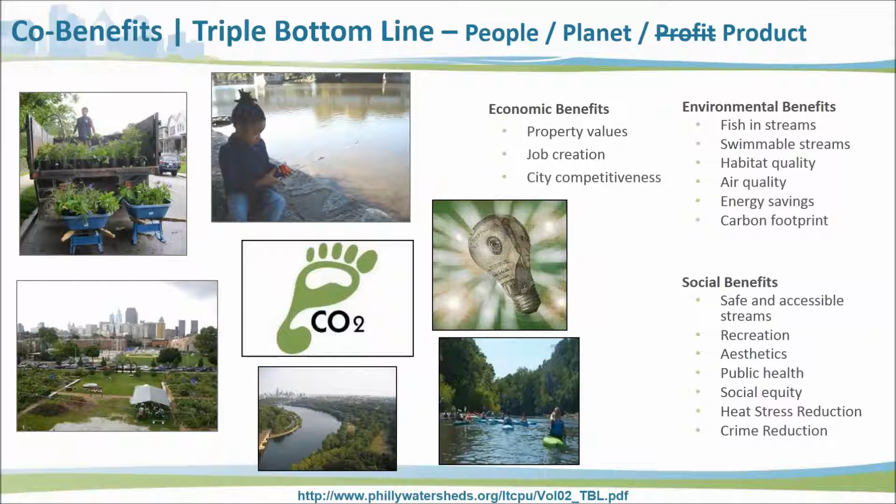What about the social side and the environmental and the economic side of whether or not it works? A lot of what we did when we embarked on this program was the people, planet, profit kind of concepts. And I intentionally strike out profit there because we're not a profit-driven organization. We're a product-driven organization. But is this stuff coming to life?

I'm happy to say that it is. We are seeing non-traditional returns on investment that are really non-traditional. These are based on studies either done in the city or by folks that have used city data, national studies that may have been based on Philadelphia information.

But for the sake of time, I just wanted to point out some of these key words here. We're seeing public health and safety, crime and mental health benefits, higher life satisfaction, increased well-being, decreases in crime, reductions in narcotic possession. You look at academic improvements with test scores and graduation rates, stress reduction. Again, this data is based on studies about co-benefits of nature-based design.

So the stuff works and it's exciting. And from an economic standpoint, I'll give a shout out to the Sustainable Business Network report. This is a phenomenal report on the economic impact of Green City Clean Waters in our first 5 years of implementation. So just some sound bites in there from tax revenue, industrial growth, and jobs creation.

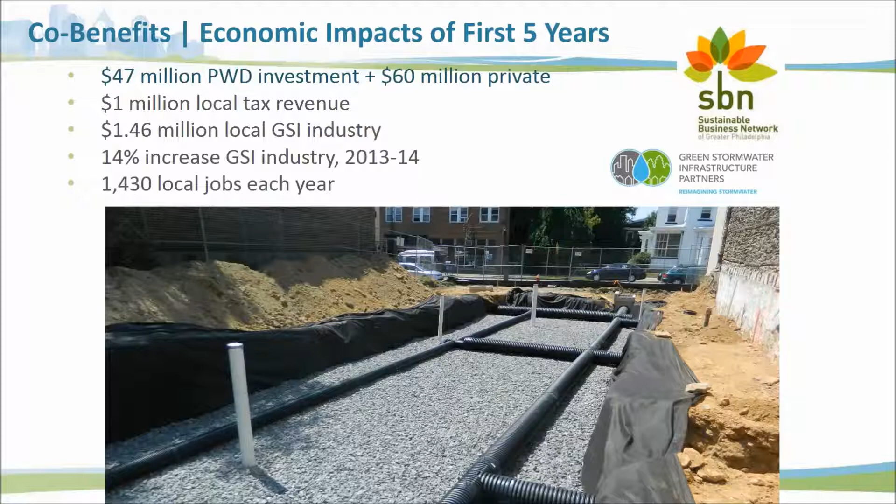I could definitely give a link to this report. It's connected to our website, but it's a phenomenal read, and it clearly shows that we can build a just and thriving and sustainable economy in a city, and green infrastructure can be at its core.

So just to close out here, we have a long ways to go. I'm going to use the buzzword all the time, innovation. What does it mean? Innovation can mean a lot, but particularly I want to figure out ways, or we need to figure out ways, to harvest innovation to help us with design improvements, construction improvements, and specifically maintenance improvements. Maintenance costs are higher than we want them to be right now, and that is what we have our eyes focused on.

How do we start bringing maintenance costs down moving forward? Clearly innovation has a role, not just with programmatic efficiencies or technologies, but also with project delivery mechanisms. I mentioned that incentives program, that grant program, that's just one delivery mechanism. What else is out there? What other delivery tools exist? What other public-private partnerships exist? And how do we get into that space?

We need to continue the momentum with our National Green Infrastructure Practitioners Exchange, a member-based group of 50 or so entities that meet frequently to exchange information in the practitioner world. We need to continue to focus on the benefits of green jobs and green growth. We have to continue to monitor at scale, because if we can't prove this works at scale, we don't meet the backbone regulatory compliance obligation.

And then my favorite piece of this is how do we continue to harness the power, the opportunity, the excitement, and the potential of our community partnerships to help us address a lot of the local needs we have. The long-term piece is continued integration with flooding, climate change, and climate resiliency. So all that fits into Green City, Clean Waters now and into the future.